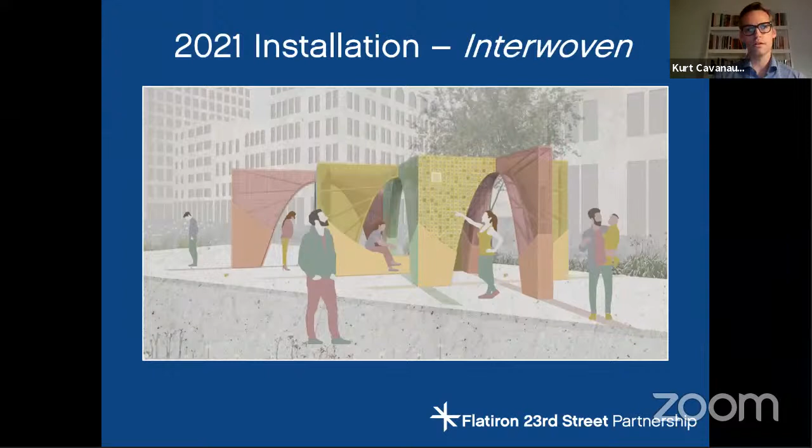In early August, partnership staff and Van Allen staff reviewed those designs and portfolios, and then the next day, myself, a couple others from our staff, as well as Van Allen's leadership, held interviews with 2 finalists. This year's piece was awarded to Atelier Cho Thompson, a New Haven and San Francisco-based firm, for an installation called Interwoven.

Interwoven is archways, a hammock, and benches constructed with steel framing, netting, resin panels, and high-density cork. The firm is very committed to sustainable design and carefully chosen materials, including the rapid renewable cork and the steel, which is made from mostly recycled content.

This piece here gives you an overview of how it's constructed and what it's going to be. It's basically 3 sets of modules with arches with a steel frame, with a hammock component to the southern third, a bench component in the middle third, and an open frame on the northern end that'll have a fun story wall as well. There's another piece here showing the side angle looking from the west to the east.

On the northern end, the panel has pieces you can see there. That will be a prompt that says, 'I dream of a world where we can,' and people will respond to that with written submissions, but only during activations. It will not be anytime you can plop a response to it.

The middle archway shows the bench feature. The bench is actually made of cork, as are the footings of the piece. And then the southern piece will show the hammock to the right, and the bottom forms show the 'feet,' so to speak, on the bottom of the piece.

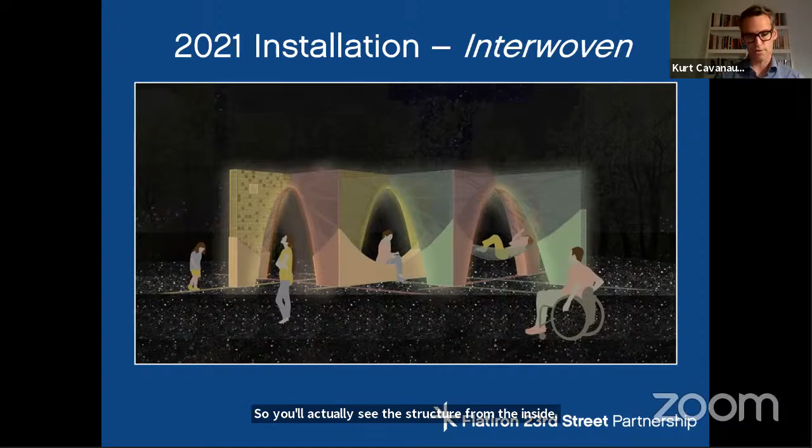Most of those are what is called 3-form resin. It's a very hard, almost hockey puck-like resin material that you can sort of see through a little bit. The top will be polypropylene quarter-inch netting that will be painted and installed to the sides as cladding. So you'll actually see the structure from the inside and from the outside, but you can't climb on or touch the structure that forms the skeleton of the piece.

Atelier Cho Thompson was co-founded by Christina and Ming, who you see there to the left. They're bi-coastal, based in New Haven and San Francisco, and they were founded in 2014. This year, the project team includes them as lead design, and Smart Department, which is currently fabricating and will install and deinstall the piece. They're based in Bushwick, so they are a New York City firm.

Funding for the piece, first and foremost, comes from the Flatiron Partnership, but Atelier Cho Thompson has just knocked it out of the park with their own fundraising, including grants from Poise, the Bounce Back Grant for women-owned businesses, and a $20,000 donation from Standard Asian Americans as part of the Asian Pacific Fund, and an anonymous donor also donated $10,000 to the piece. A lot of in-kind sponsors have contributed as well.

Engineering, lighting, and even the signage for the piece were all donated. 3-form, the cladding on the sides and bottom of the piece, almost 6 figures worth of material was donated, so that's incredible. And I will read the artist statement about the piece.

Interwoven celebrates the joys of intersecting with our community in public space. Inspired by the dynamic geometry of intersections that form the Flatiron Building's shape and America's woven tapestry of cultures, the installation is an unfolding set of interactive archways.

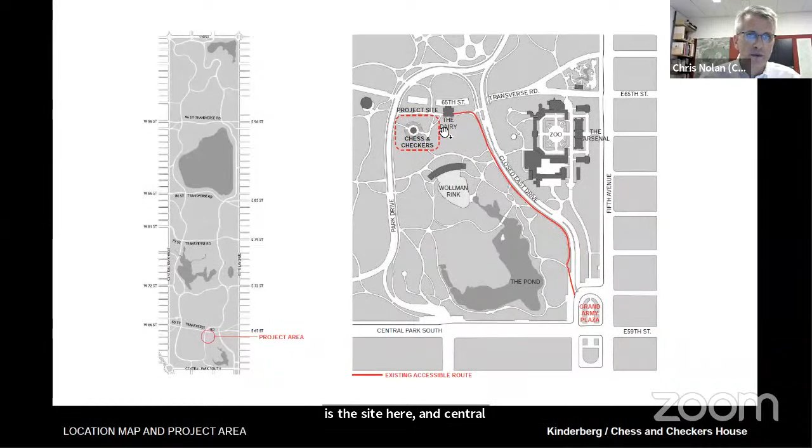So this is the footprint of the historic Kinderberg, which was the park's largest rustic structure. I'll get into some of the existing conditions a little bit later. This is the site here, kind of Central Park South, Fifth Avenue, Grand Army Plaza. It builds on some accessibility work. We have just completed the dairy, which creates an accessible route coming from the southeast corner of the park up to the dairy, and then ultimately up to Chess and Checkers if this work is approved. It brings back an important historic element, character-defining for this area of the park.

This is the accessibility work, soon to be open to the public. The path is now open to the public. The restoration work at the dairy has now been completed and will be opening in the coming days. A beautiful restoration of the core and shell. Interior work has been done also, really spectacular.

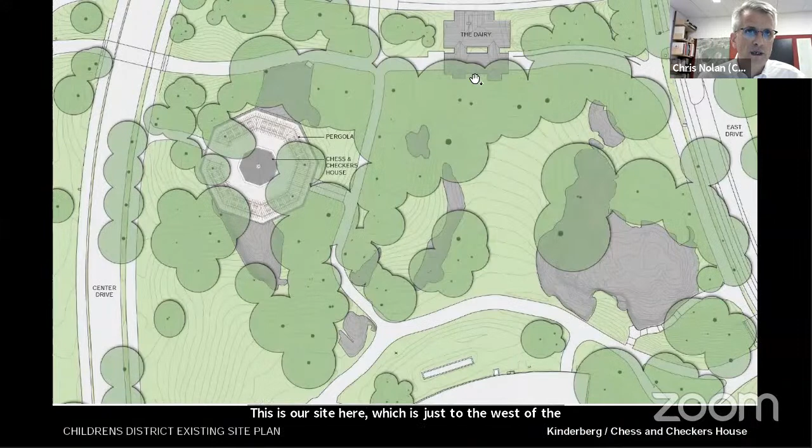This is our site here, just to the west of the dairy. This is the access ramp to the dairy, the loggia, which was restored. And this is the site of the Kinderberg. This shape here is the actual historic footprint. Inside that was the Chess and Checkers house, built in the 1950s. I'll go through some of the history, and our project is to restore the rustic structure, restore the existing Chess and Checkers building, and create accessibility to the site.

So some history. As I mentioned, this is all part of an area of the park south of the 65th Street Transverse Road, which was referred to as the Children's District. Within the Children's District was what was referred to as the playground or the ball grounds, which was developed into Heckscher Playground and Heckscher Ball Fields.

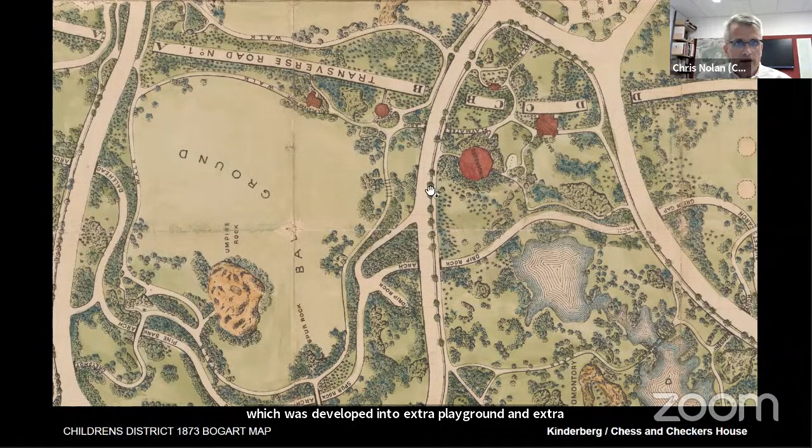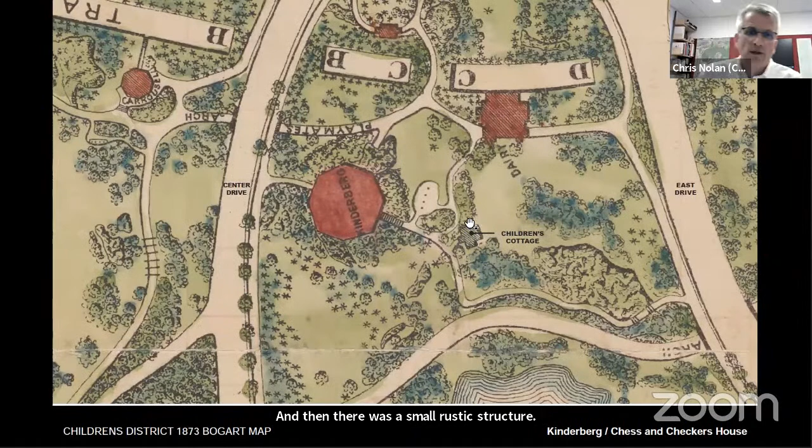On the east side of the Center Drive, there was the Kinderberg, which is the park's largest rustic structure, the dairy, which was conceived to distribute milk from upstate New York to children, and there was a small facility called the Children's Cottage, which was basically a public restroom to accommodate this particular cohort of park users.

This is actually an interesting footprint. It was a historic swing set from the 19th century.

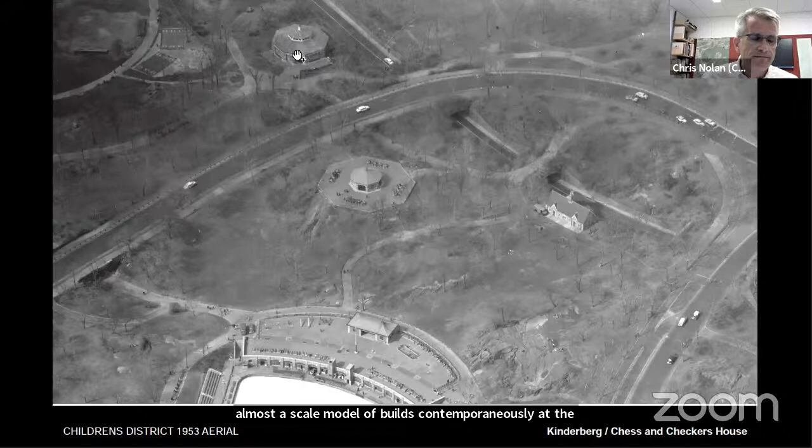The rustic structure was lost in the 1940s, and by the 1950s, the Parks Department had proposed the construction of a small brick pavilion referred to as the Chess and Checker Shelter. It was an unheated facility that opened up to the plaza area out front with chess and checker tables. You can see it's almost a scale model, built contemporaneously at the same time the original wood carousel building was rebuilt as a brick structure. It's a similarly detailed structure and has remained intact since then.

As you can see, it was out in the blaring sun, with chess and checkers tables around it, and the footprint has been marked since the park's original construction.

So the existing condition: the chess and checkers structure has remained essentially the same. We added heat to it in the 1980s, and in the mid-1980s, I believe 1986, we constructed a dimensional lumber rustic pergola to create some sense of scale around the building itself. The trees were added sometime before that, we don't know the exact date, but probably sometime in the 1970s.

And the wood and concrete benches go all the way around. You can see this is what marked the original footprint. The condition of the pavement, the tree pits, and the pergola itself is in poor shape. The pergola needs to be rebuilt, and we now have the opportunity to recreate it as the rustic structure historically was. The pavements will be replaced, and the benches and chess and checker tables will remain.

I'll take you through the proposal. The actual core and shell of the building we will restore in kind, cleaned and repointed. The doors and windows will be replaced in kind, without the security grating.

The interior space we have used as a kind of intermittent programming space since the mid-1980s, never terribly successful, operating as a visitor center. The primary purpose is to give out chess, checkers, and board games, which people primarily play outdoors. It's an odd-shaped building with no public restrooms, and literally we hand out tour material for people to go use the park. One of the greatest questions they get is where are the public restrooms, and there are none in the area.

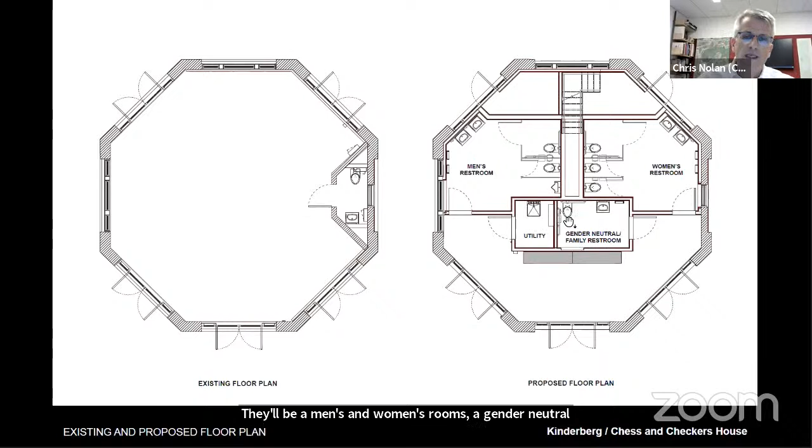Significant improvement in terms of public amenities in the area. The interior space, two-thirds of it, will be converted to public restrooms, much needed, since there are no public restrooms in the dairy either. There'll be men's and women's rooms, a gender neutral facility on the front side, and necessary utility space to keep these restrooms clean.

There's some mechanical space on the back side. The east side of the facility will be open to the public, and we'll run our programming out of there, giving out chess, checkers, and board games for the programming outside.

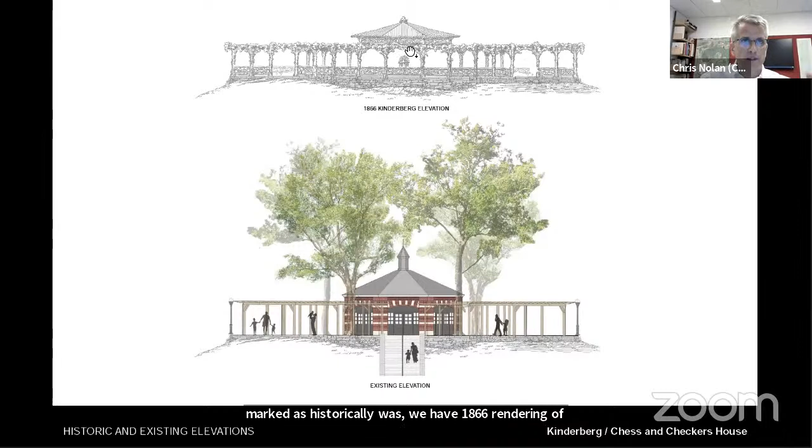So the primary gesture of the project, in addition to the public restrooms and accessibility improvements, is to recreate the rustic structure. The footprint of the Kinderberg is well marked as it historically was. We have an 1866 rendering of what it was, which shows kind of a central covered section.

For the most part, the existing slate roof is kind of referential to that, and our intent is to replace the dimensional lumber pergola with a rustic pergola around the outside, increasing the scale and mass of what's out there today significantly.

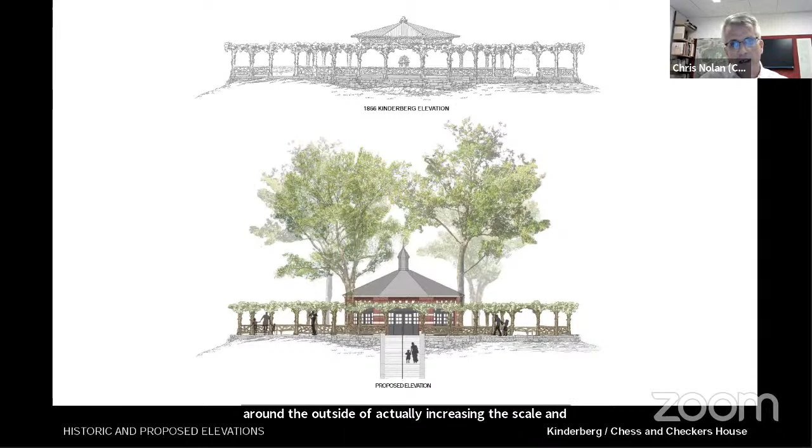You can get a sense of how elaborate the interior of the rustic element was, with benches all the way around. This is basically a plan view.

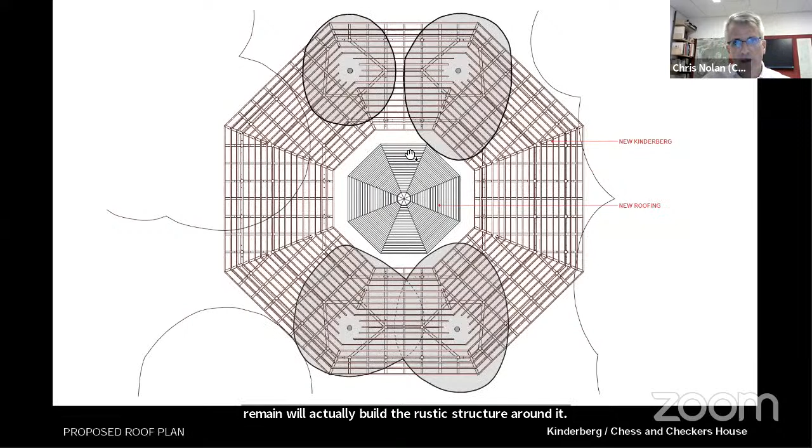The existing trees will remain. We'll actually build the rustic structure around it, and push the rustic structure out, cantilevered just over the edge as it was historically. Most importantly, this marks the scale of that as it relates to the rest of the park, kind of enveloping the structure itself.

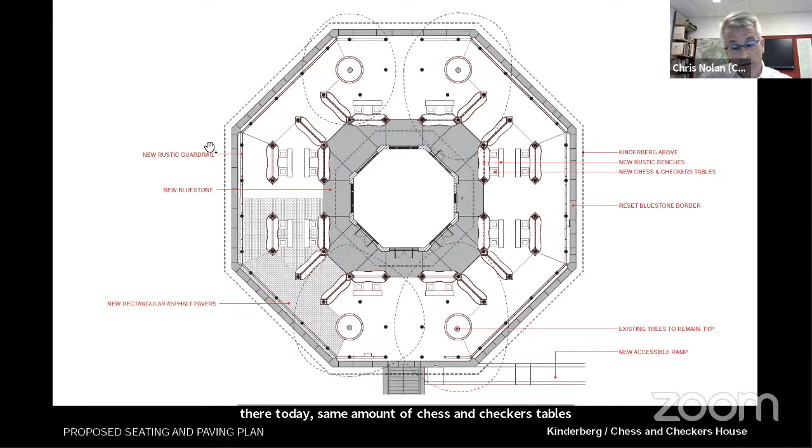You get a sense of what that is in plan. There'll be an increase in the amount of benches there today, the same amount of chess and checkers tables. The tables and benches will relate to each other, with an increase in benches around the perimeter, looking out to the views from this high point in the park. You get a sense of what our model is as we created that.

Much of the decorative rustic work we do in the park, almost all of it outside of the structural work, is done by our highly qualified in-house rustic carpenter crew.

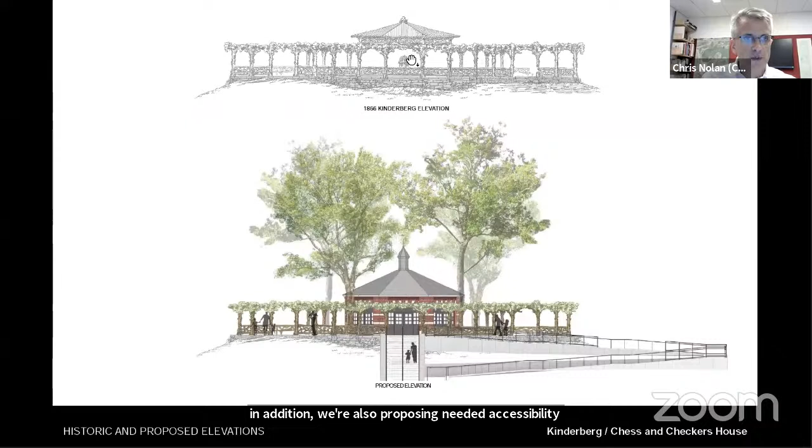In addition, we're proposing needed accessibility improvements to make this site and the public restrooms accessible. You get a sense of what it was historically, and our intent is to create a ramp modeled on what we did both at the dairy and successfully over at the Arsenal, coming in from 65th Street down to the zoo and the Arsenal area, starting at the same entrance point up to the Kinderberg and onto the plaza itself as an issue of equity and access.

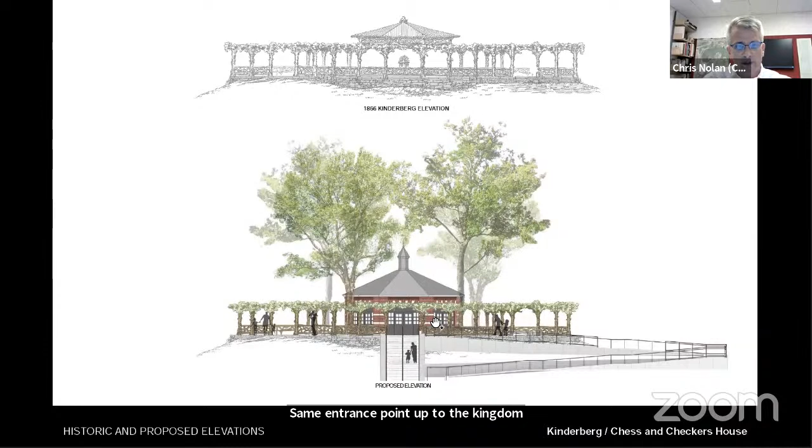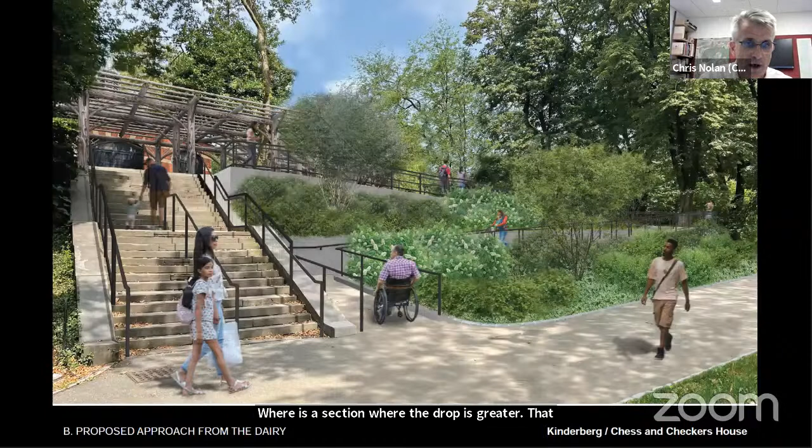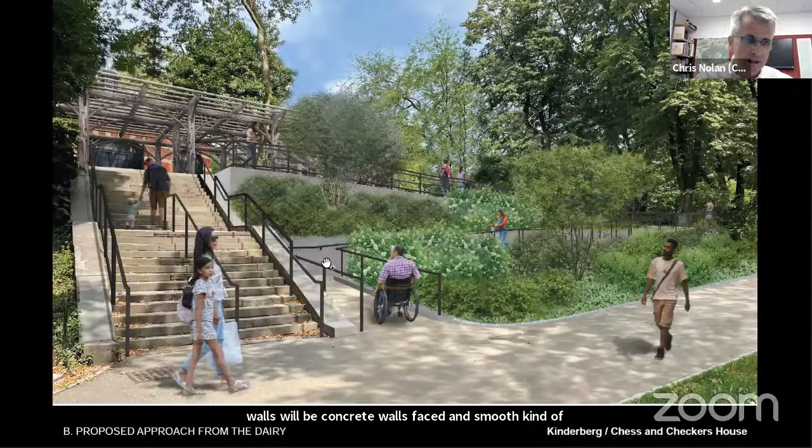It'll be a very transparent guard built onto the handrails with the wire mesh used around the playgrounds, as is the case along here, with very dense planting to hide it. The walls will be concrete, faced in smooth, large pieces of bluestone, to be like a modern element behind the plantings without being too heavy. I want to end on an illustration of what we had done at the Arsenal.

It's actually been an enormously successful project. There was some concern that it wouldn't blend into the landscape, but over time, as the planting blends in, it's actually become one of the most heavily used entrances now. All the people who come to both the Arsenal and the Children's Zoo, people with mobility devices, baby carriages, and anything can get down that slope. And that is the whole proposal.

I'll be happy to answer any questions. Thank you so much, I'd just love to kick off questions with, can you give us some detail about the price tag for this, the funding, and the timeline?

Sure, Lane, you want to handle it? Yep. So the price tag is roughly a $7 million construction project, and the funding is privately funded. It's actually the same donors who did the dairy restoration, so it's a continuation of that, and actually the same family foundation that funded the Belvedere restoration we did a couple of years ago.

The timing is that we're hoping to finish the public review process and go through Landmarks and the Public Design Commission by the spring, and be in construction a little bit later in the spring. To begin next spring? Next spring. And then how long do you think it will take? Our goal is to be done by the end of calendar year 2022. As we complete the design and figure out exactly how we're breaking the project into contracts, we'll hone in on that a bit more, but our goal has been the end of calendar year 2022 — about a 9-month construction process.

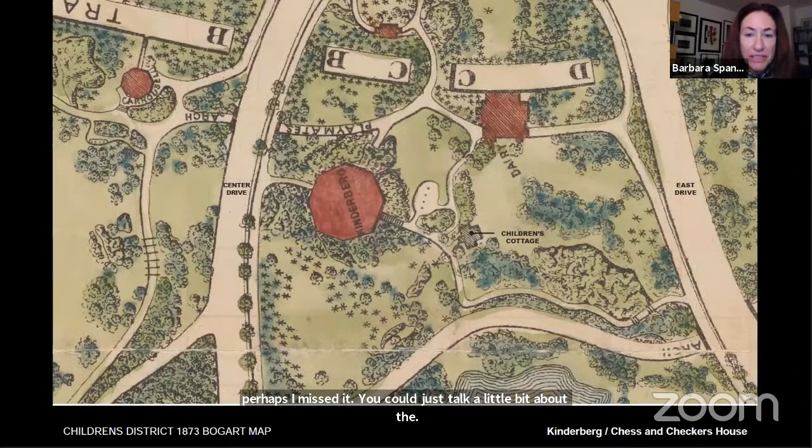Thank you. Thanks, Karen. Yes, Barbara. I just wanted to go back to the Chess and Checkers Pavilion. Perhaps I missed it—could you talk a little bit about the doors? I mean, everything is going to be replaced, and could you explain a bit more about what's going to be there when this is all done.

Sure, Barbara. Yeah, so the doors and windows will be replaced as they are. The masonry will be cleaned. Basically, the difference will be that it won't have the actual security wire. That's what I wanted to know. Yeah.

And we'll get a handle on the signage and the Windex bottle up there too. And I assume that the doors will be ADA accessible, of course. Yes, right. Okay, thank you.

Thanks, Barbara. Other questions from members of either committee? Yes, Suzanne, go ahead. Two quick things. One is, can you speak to any increased lighting in the area, because it's pretty dark? Sorry if you've already mentioned that and I didn't hear it. And secondly, will you be selling any food or drinks, and if so, will you be creating more of an opportunity for sanitation?

There will be no food or drink concession up there. The dairy is actually our primary retail gift shop in the park, and all retail operations will happen there. This is purely public programming.

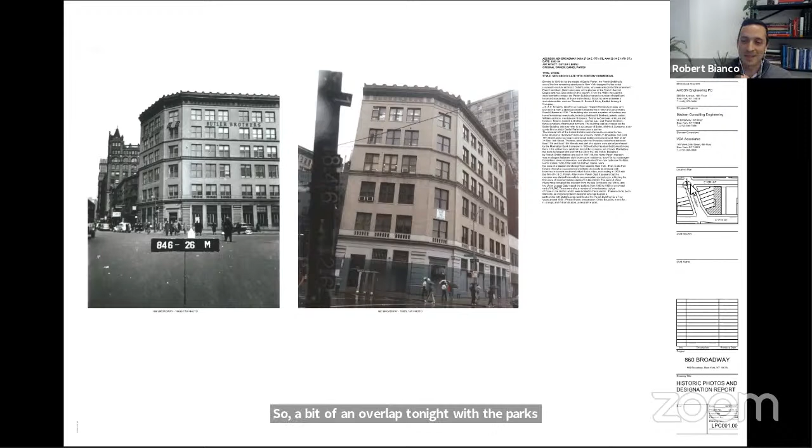860 Broadway is located in the Ladies Mile Historic District, and we are the one building in the Ladies Mile Historic District that fronts onto Union Square Park. So a bit of an overlap tonight with the Parks Committee. If anyone stuck around from the Parks Committee, I thought this was a nice opportunity to discuss an application for outdoor recreation space on a building that overlooks a public park.

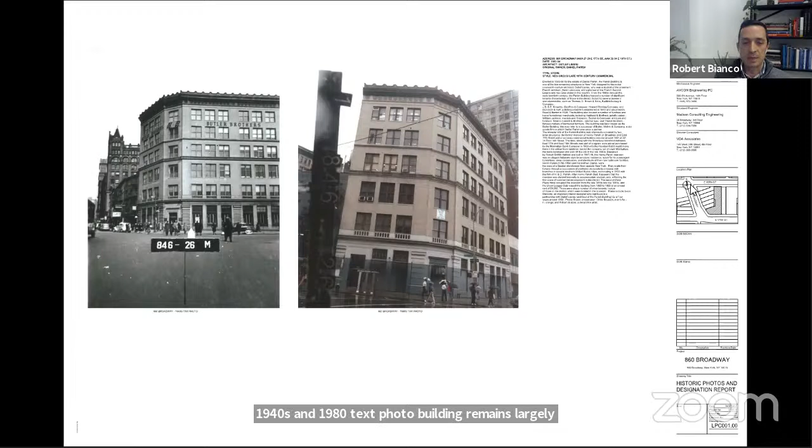The building was constructed in 1884 by French-American architect Detlef Lienau. You can see in the 1940 and 1980 tax photos the building remains largely unchanged today since a major facade replacement in 1925. However, we were recently involved with some building infrastructure upgrades that occurred a few years ago, including elevator modernization, a new elevator that meets current code for ADA accessibility and stretcher compliance, and an expanded main building lobby. The building is accessed from Broadway.

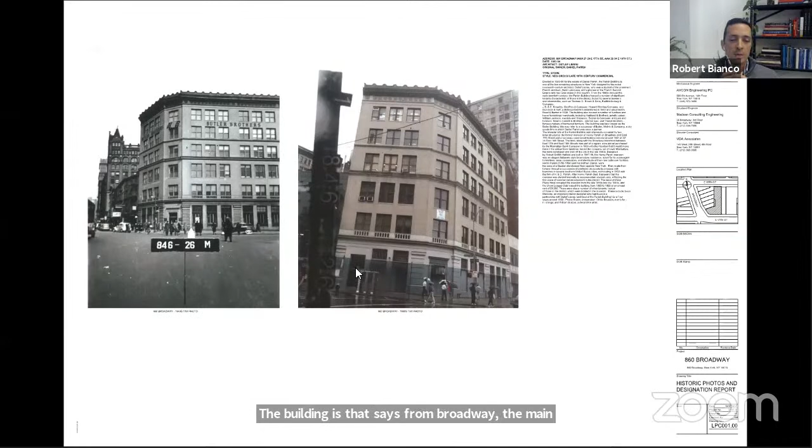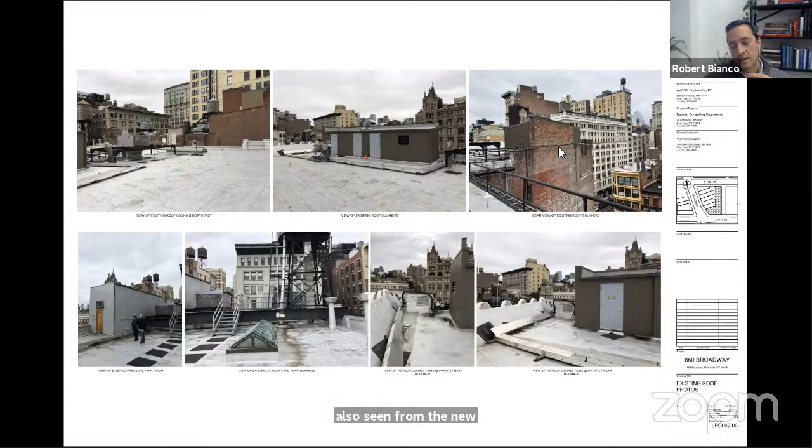To the left-hand side is the existing stair bulkhead, egress stair bulkhead, also seen from the north lot line. This is the facade facing north into the Ladies Mile district. The bottom row of photos are mostly showing the condition on the north side of the building, which is closer to 18th Street. The building also fronts onto 17th Street.

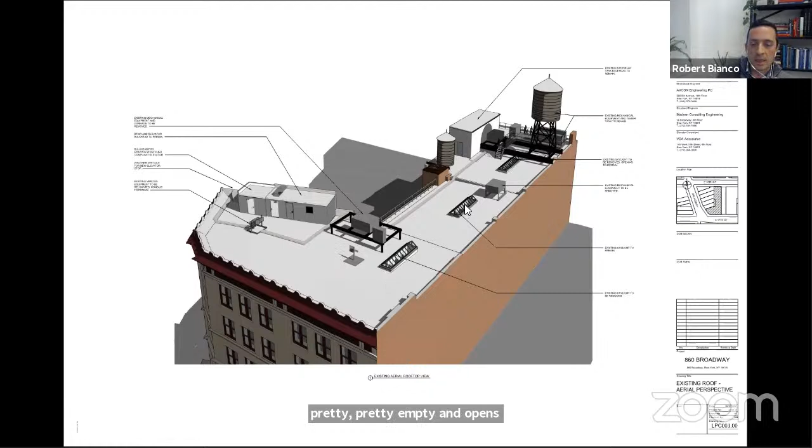A little bit easier to understand in this bird's eye view of the existing condition. The main stair and elevator bulkhead is located along the north lot line wall. The new stretcher compliant elevator is located at the southwest corner, closest to the main building entrance at Broadway. Toward the center of the building, the rooftop is pretty empty and open space, other than 3 existing skylights at the center line of the building, and some existing mechanical equipment on dunnage, which will be removed, replaced, and relocated to the north side of the building.

The north portion of the roof houses some mechanical equipment, 2 large wooden water tanks, an existing sprinkler tank bulkhead, and all that will remain.

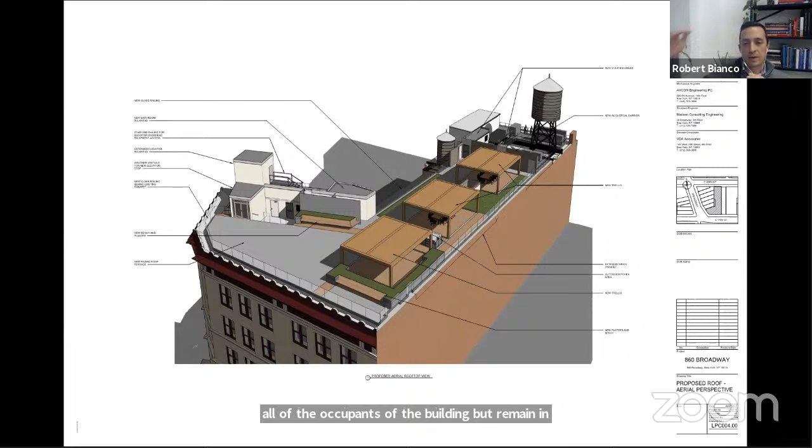This is the proposed condition. We are proposing a new rooftop terrace on a new raised platform that will be elevated above the existing roof. The existing office tenants, all of the occupants of the building, will remain in place during construction, which is the reasoning for building a platform above the existing roof so that the waterproofing envelope can remain intact while this is being constructed. The new stretcher compliant elevator will be extended to the roof level, and a new vestibule will be provided for weather protection for that elevator.

To the east of the stair bulkhead, we are expanding the bulkhead to accommodate 2 single-use, single-occupant toilets for the rooftop occupants.

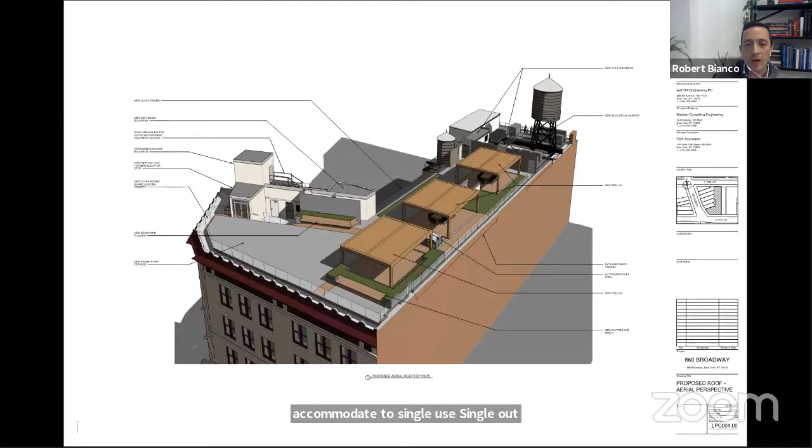All of the mechanical equipment that you saw in the previous slide will be relocated to the north portion of the roof. At the eastern portion, we're proposing 3 trellis pergola type structures to provide sun shading and some smaller gathering spaces for breakout meetings and small conferences.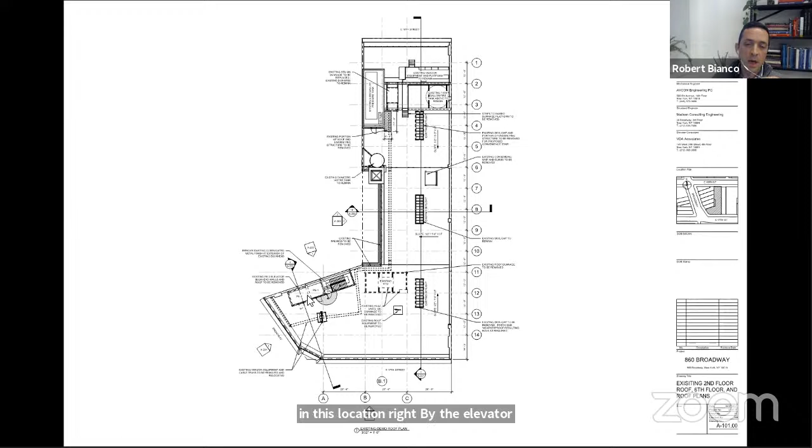Existing floor plan of the existing roof condition. Currently, only 1 egress stair extends to the roof, in this location right by the 2 elevator bulkheads. We're proposing to extend the stair to the north, up to the roof, to provide a second means of egress for the rooftop occupants.

An additional bulkhead that would be for dedicated use for the top floor tenant. At the northern extremity of the rooftop terrace, we're proposing an acoustical barrier to mitigate noise between the existing and relocated mechanical equipment and the newly proposed rooftop terrace.

Again, the stretcher compliant elevator will be extended to the roof and provided with a weather protection vestibule, and new single occupant toilets and an outdoor kitchen area will be provided, basically stacking with where the plumbing occurs on the floors below.

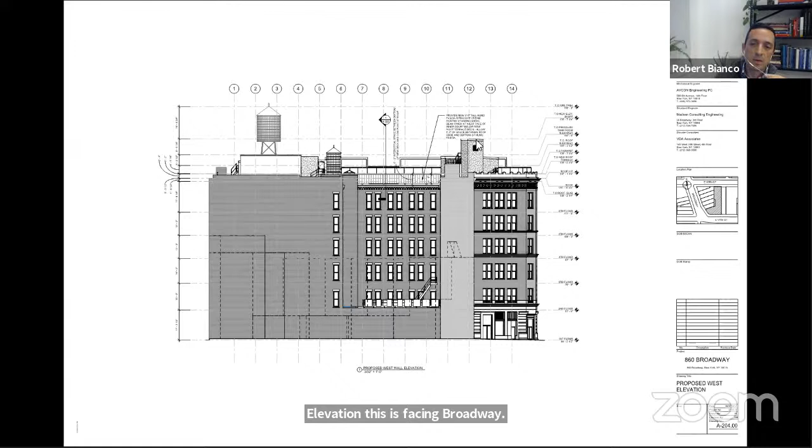At the western lot line elevation, facing Broadway, this is the existing condition. And here is our proposed condition, with a raised elevator bulkhead. This is the little vestibule for the new elevator.

At the inner court facade, this is the portion of the roof that slopes down the most. The existing roof below the raised terrace is about 5 feet below the terrace level. So we are proposing a metal panel fascia to cover that open gap, and again, a glass railing behind that.

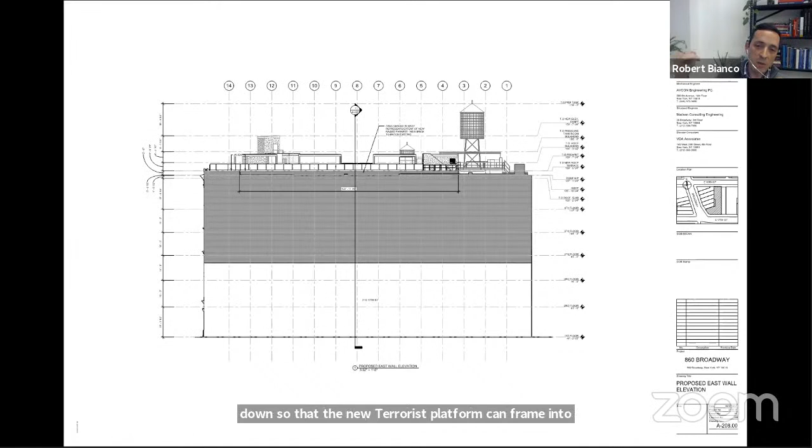This is the existing east facade facing east toward Park Avenue. In this location, we are proposing to extend and raise the existing brick parapet in the areas where it steps down, so that the new terrace platform can frame into the existing bearing wall, again with a glass railing behind that.

The 3 open pergolas can be seen beyond, and raised bulkheads beyond.

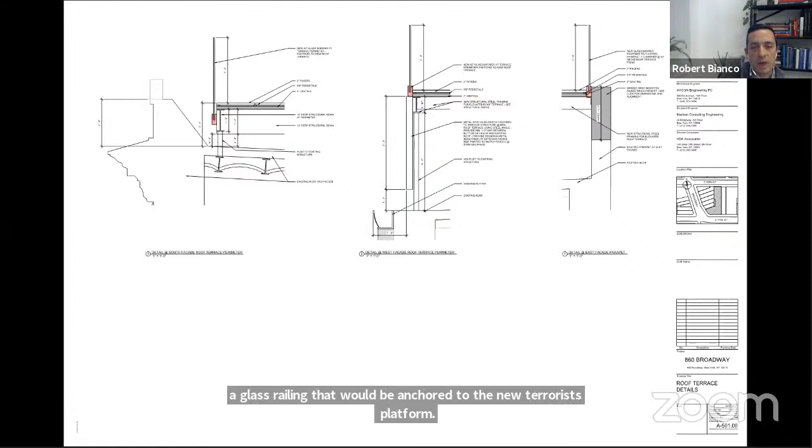On the left-hand side of the page, this is the parapet condition at 17th Street and Broadway. We're proposing a glass railing that would be anchored to the new terrace platform, behind the existing parapet. The center detail is at the western lot line, and the right-hand side of the page is at the eastern lot line.

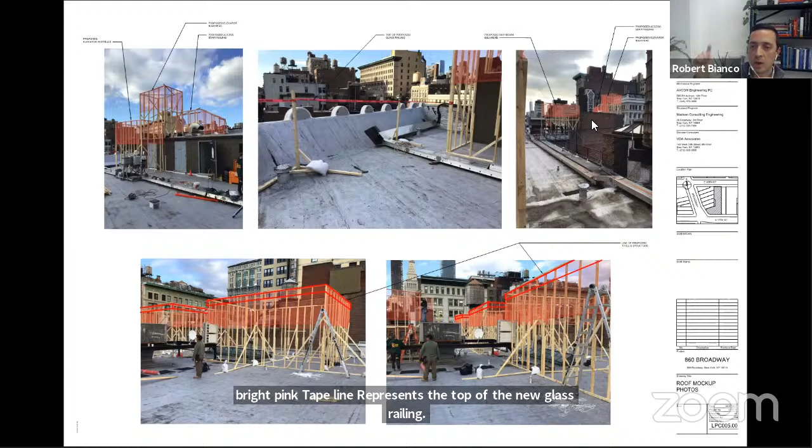In these bottom images, I just want to clarify that the mock-up was constructed to identify the highest point of the trellises or pergolas, but the netting is a little misleading because it's deeper than the actual structure will be. I've highlighted in a red dashed line to clarify that this will be an open structure with a flat roof, and the sides will all be open.

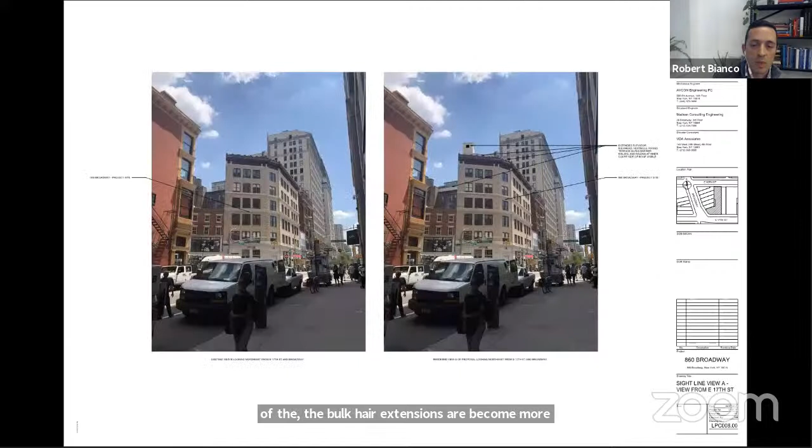Starting at 17th Street and Broadway, standing between Broadway and Fifth Avenue, looking east. We can see the existing condition on the left-hand side of the page, proposed rendering on the right, showing the expanded bulkhead, elevator bulkhead and vestibule. Beyond the adjacent buildings, you can see the extended or elevated roof terrace platform and metal fascia and glass railing.

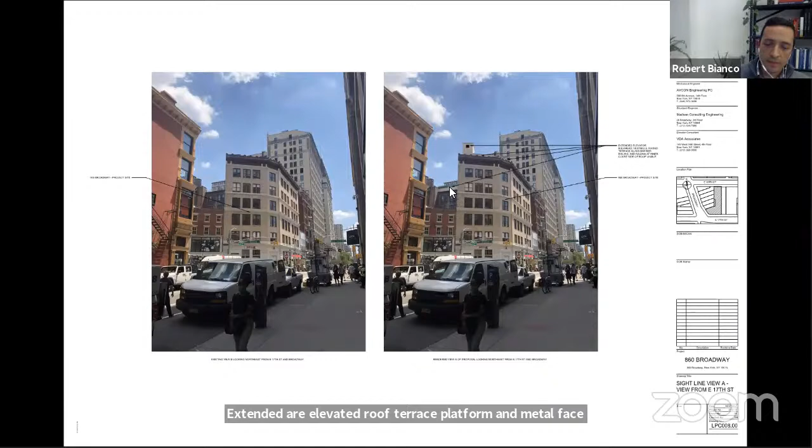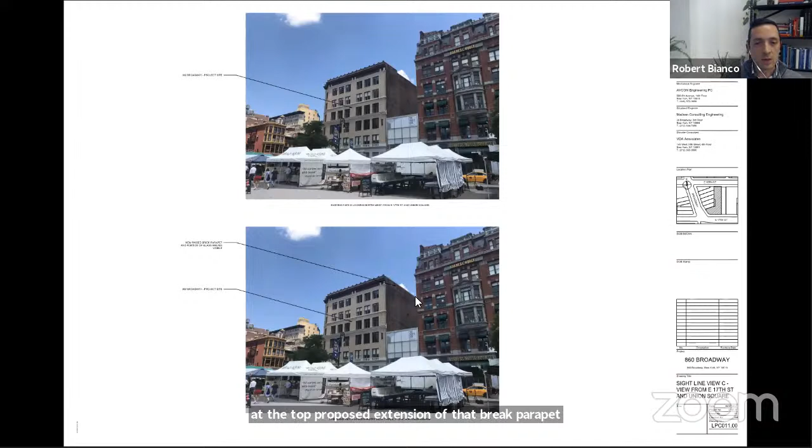Moving to the east side, this is standing within Union Square, looking back up to the north at the building. Existing condition at the top, proposed extension of that brick parapet to allow for the framing of the new roof platform, and then a photograph of the mock-up, showing a little bit more visibility of the pergolas than we had anticipated, but still minimally visible.

The further you get away, you do start to see more of these rooftop accretions, and a little bit of the elevator bulkhead, but that is also in the context of adjacent buildings, bulkheads, and various rooftop accretions on different landmark buildings fronting onto Union Square.

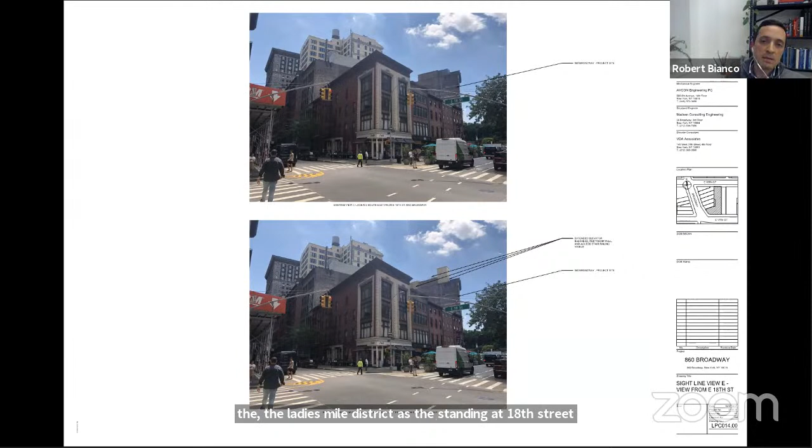Moving to the north as we're moving into the Ladies Mile district, this is standing at 18th Street looking south, existing photograph on top, proposed rendering at the bottom. The bulkheads are visible in this scenario, but they are seen in the context of secondary facades, not seen at all in the context of the building's primary facades. The mock-up construction confirms what we had anticipated.

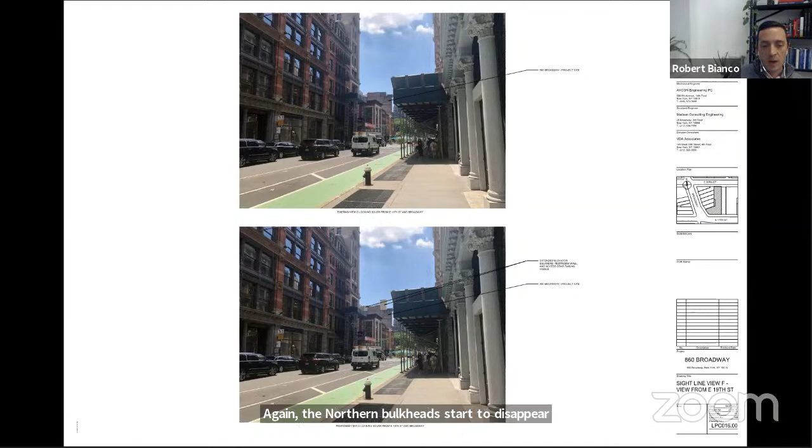Moving further up north, the northern bulkheads start to disappear. That main elevator bulkhead is still quite prominent, as seen in the mock-up construction.

By the time you get to 20th Street, the elevator bulkhead visibility starts to fade away. It's still visible at 20th and Broadway, but anything north of that starts to really recede.

Moving to the south, looking north, now this is looking at the primary facades of the building. In the bottom image, you can see that the bulkhead is visible, but here from the south it is visible in the context of other buildings in the background, and it's not seen against the sky.

We should also mention materials. We're proposing a light colored stucco for the bulkhead structures to reference the buff color of the main facade's brick, and also to allow those bulkheads to recede into the background, maintaining the prominence of that very strong expression of the existing scalloped parapet.

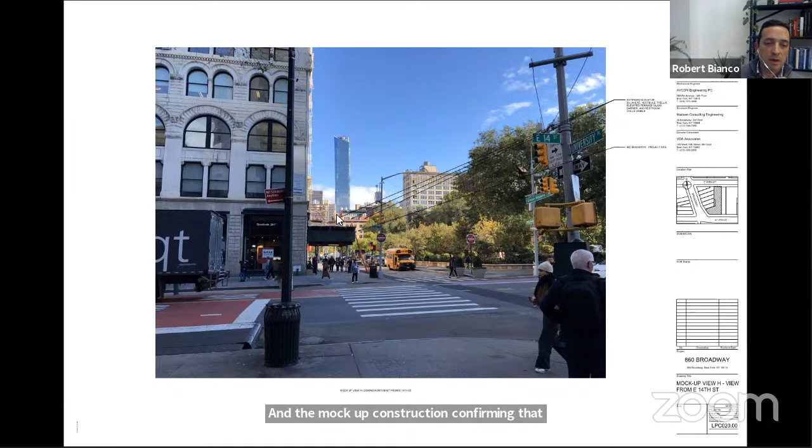The mock-up construction confirms the visibility of the elevator bulkhead extension, bathroom bulkhead extension, and a little bit of the trellis proposed pergola.

That visibility remains all the way down to probably 10th Street, but the further you get from the building, it really becomes so far away - still visible, but really far in the distance and in the context of a lot of other bulkheads and structures beyond.

We did also confirm visibility from the 18th Street side. There is practically no visibility of any of the structures we're proposing from 18th Street. There is a little bit of visibility looking over the one-story building to the east of the railing, and that's about all that can be seen from that vantage point.

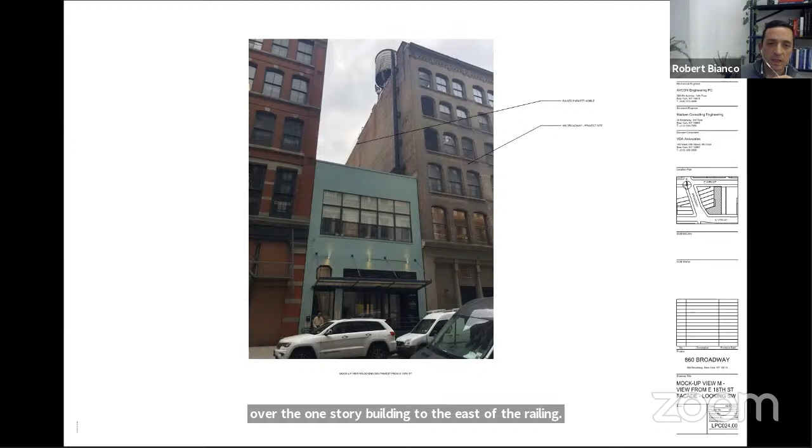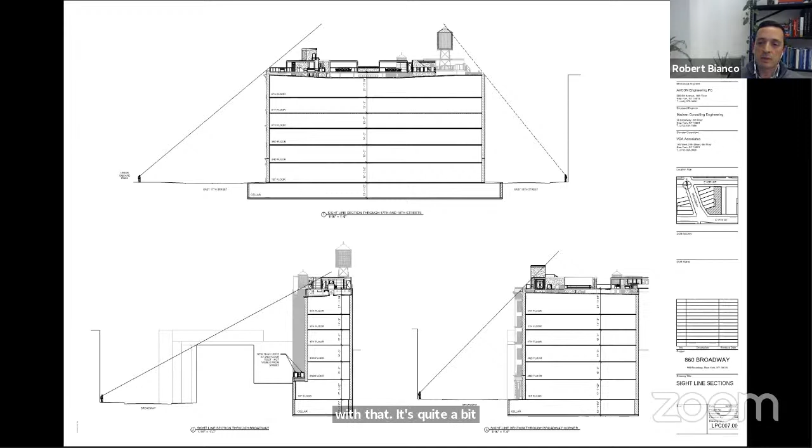Was the height of the bulkhead, is this the minimum? I mean, you can't make it any smaller? It really is the minimum. It's a factor of these elevators having their machinery in the cellar, so this is the overrun. Even with that, it's quite a bit taller than the existing roof since we're trying to extend that access to the roof level itself.

Could you talk a little bit about the kitchen on the roof? How do you envision this is all going to be used? I mean, this is not a restaurant. No, absolutely not. It's for use by the building's occupants. The kitchen area is located in the center for use by occupants to the north or south to share, and that location, along with the bathrooms, is really just determined by the location of the plumbing stacks below.

How it's going to be used is really just for maximum flexibility—not large events, but whatever in-house events that one of the office tenants might plan for: small gatherings, office breakout space, an office lunch, or something like that.

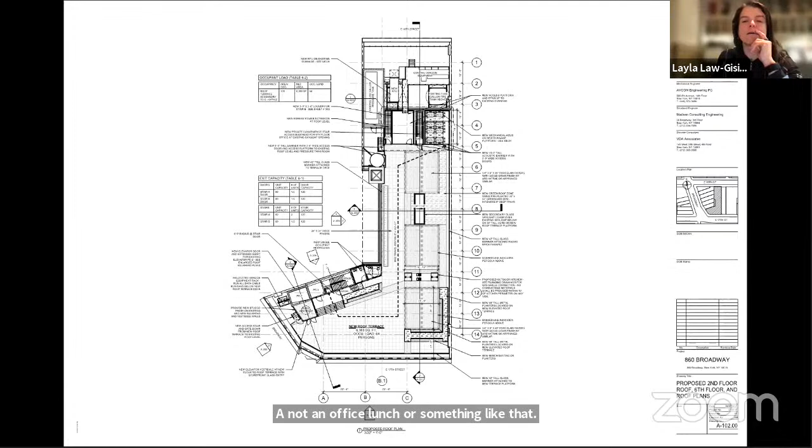Both of my questions are safety related, both for the tenants and for the structure itself. First, regarding the railing you mentioned—I believe you said it was glass—can you share the height of that railing? The reason is both for safety of the users of that space, and because the street underneath, in front of the landmark building, is a one-way street with a lot of bike and pedestrian traffic. You've probably been familiar with some of the accidents that have happened there. I'm also a little concerned about the structure itself in case there might be a fire, for the kitchen space, not to mention concern for people nearby.

Is the concern for fire safety related to the railing height question, or is it a different matter? It's two different parts. The railing height question is really about the fact that there are pedestrians underneath—obviously you don't want things flying over that railing, potentially impacting pedestrians in front of a historic building, one appreciated for its history as shopping and retail.

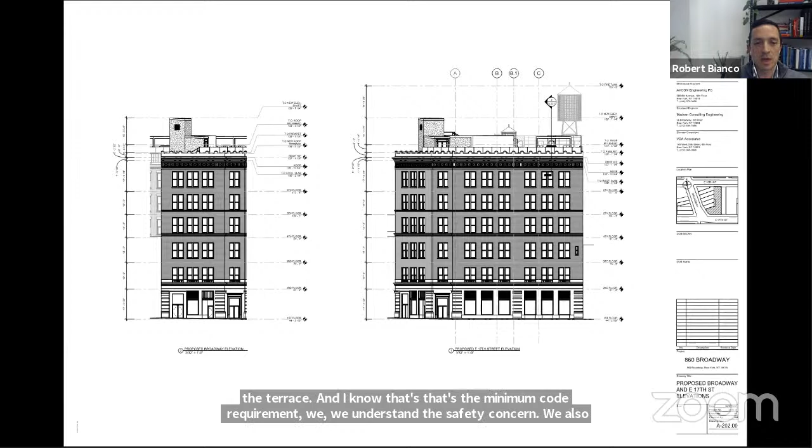We're showing the railing as 3'6" above the terrace, which is the minimum code requirement. We understand the safety concern. We're also setting the railing back from the existing parapet so it's not right at the edge—there's quite a gap between the existing parapet and the proposed railing. So I understand the concern about 42 inches being a little too low; we're trying to address all sorts of issues, visibility from the street and safety.

To address the fire safety concern, we looked closely at the rooftop occupant load, stating an occupancy of around 64 persons, which is below public assembly—this would not be a place of assembly. It would accommodate up to 60 to 66 people, I forget exactly. But we are providing the extension of the second egress stair to accommodate those additional occupants.

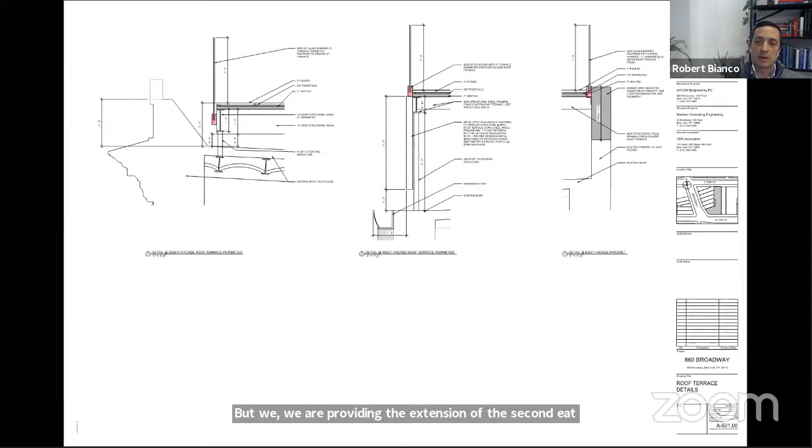My question is about whether you did any studies that pulled the pergola structure in more centrally located so it would be less visible from the public right of way, leaving the open space area more on the perimeter. I didn't know if that would yield something less visible or not. And then I have a follow-up question. Locating it more in the center, kind of where my cursor is right now.

Yes, because of the strange geometry of the building, you can see that would start to become quite a narrow space, and not terribly usable. The proportions of these more rectangular gathering spaces at the side are, I think, better for the office tenants' uses.

For meetings or conferences or just outdoor team lunches or something like that. We wanted to kind of leave this main area just open and simple, and not crowd it. The closer you get to the center, the more crowded you get into those existing bulkhead access and elevator vestibule.

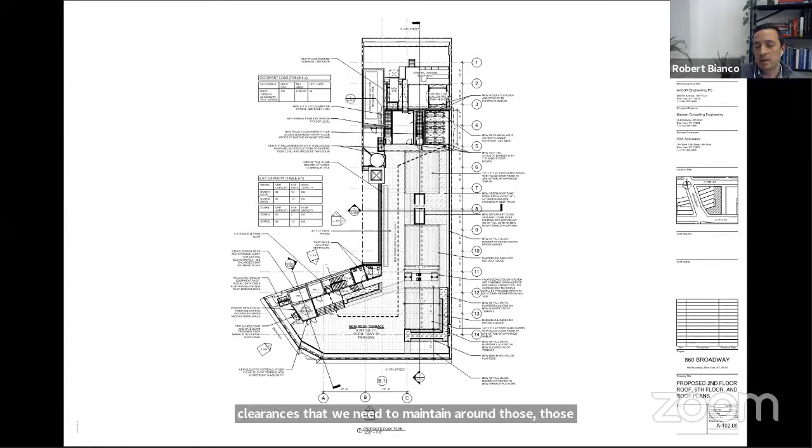There are a lot of clearances that we need to maintain around those access points. Okay, second question — if you can reference drawings 14, 15, and 17, the ones that show the visibility from some of the side streets. And the question is about the color of the material selection.

I think you said it was a light colored stucco for the bulkhead additions that matches the primary buff brick — but at the photograph, sorry, not the drawings. Yeah, sorry, my file is just a little slow. I think so — well, I'll keep talking while you're flipping.

The question is about the nature of the color — selecting the buff versus a reddish brick, because while the primary facade is buff, the secondary facades... maybe try another one. The buff color really jumps out to me compared to the red background, like the red brick from the north facades, where buff is on the primary, but that buff really pops out to me. I wondered — I'm just debating whether red brick would blend away a little bit better than seeing a big buff brick on top of the red facade.

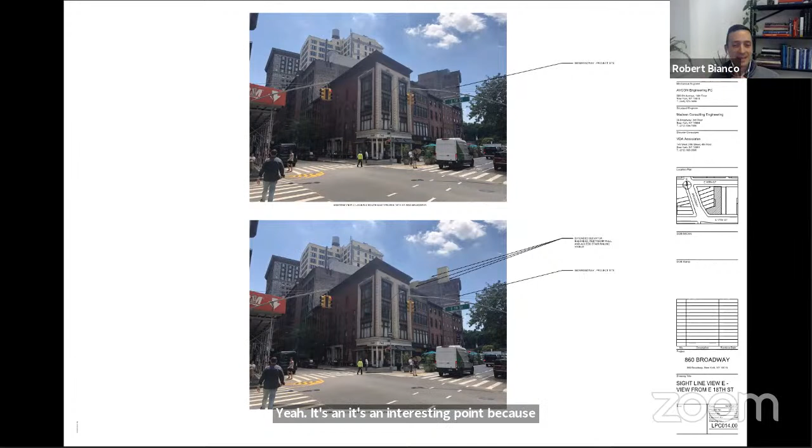Right. Yeah, it's an interesting point because we did look at it several different ways, and I think we ultimately landed on maintaining the stucco, because we looked to the existing bulkhead on the northwestern portion of the building that has that very strong line of the brick and then the bulkhead addition above. So we thought that would be consistent with the language of what exists on the building today.

But this is a point that's debated a lot at LPC. Some of the commissioners and some of the staff there like to maintain the memory of what you see here of the existing or original brick lot line wall, and treat any additions differently, just so that the memory of what existed previously is preserved.

But others might say, well, it's a brick bulkhead now — why not extend the brick to that lot line wall? So to answer your question, yes, we have looked at different ways to approach it based on discussions with LPC. We felt that this was the most appropriate way to treat those facades.

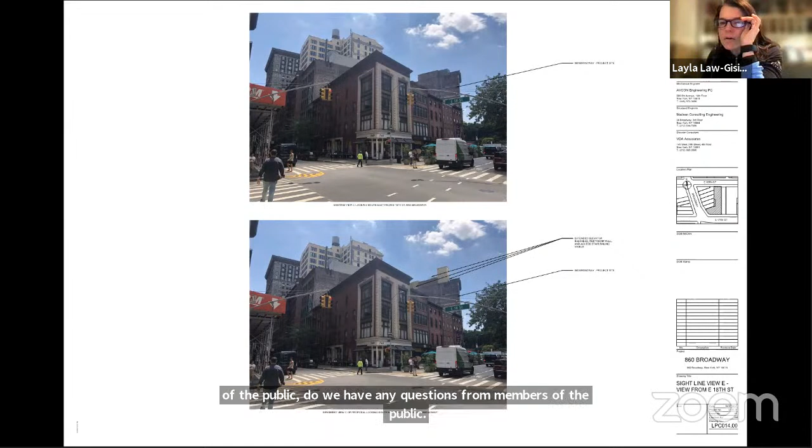Hello, can you hear us? Yes. Okay, hi, I don't know why our camera is not on. Can you turn—there's two of us here. There's Charlotte Willer and my name is Victoria Ashley. We're trying to turn the camera on so you can actually see us, but I'll go ahead and speak since I know time is of the essence.

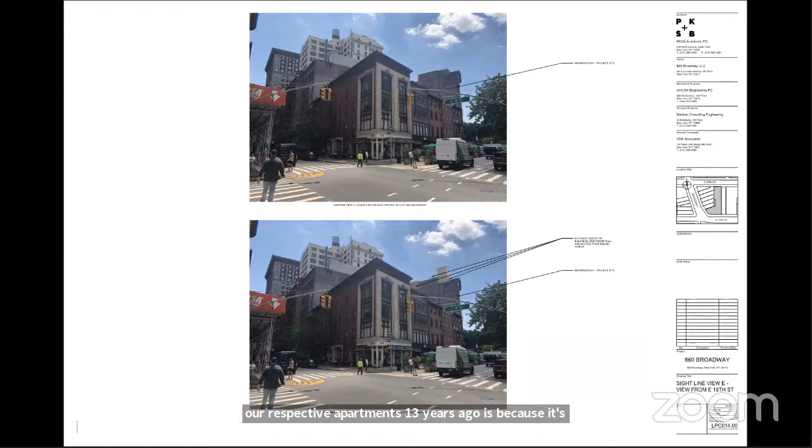We are tenants of 874 Broadway, and I'm on the 7th floor, Charlotte's on the 8th floor. We look directly across at what is being built right now, and it is very concerning to us because it is very much an eyesore from this vantage point. It impedes our view. The reason that both Charlotte and I moved into our respective apartments 13 years ago is because it's a gorgeous landmark building with an unobstructed view in an area that is not zoned for additional building.

And, you know, this is really the beauty of this building and of this neighborhood. To look at our window and all of a sudden see the structure, it clearly impedes the view. It stands out like a sore thumb because it's an unusual height that's disproportionate from the level of the roof. And it's open right now. It's just pieces of wood, as you had said, to give a rendering of it. But when it's filled in, it will absolutely interfere with our light.

Hearing the proposed recommendation for the terrace with the guest capacity of 60 people on the roof, that is also disconcerting to hear—that noise at any given hour, and cooking, etc. I'm on the board of this building, and we love our building here, all of the tenants, and we were thrilled that the decision in 2013 was upheld not to interfere with the building of 2 floors.

Right across the street from us, which would certainly interfere with our beloved views. But seeing this, we are happy to provide pictures. We have them, we can email them tonight if you like, for your consideration, just to see what it looks like from our vantage point. So we really implore you to keep the neighborhood intact as it was meant to be, and as we're enjoying it now. We really implore you to turn down the proposal, because it would be detrimental to all the residents in the building and would interfere with the beauty of the neighborhood.

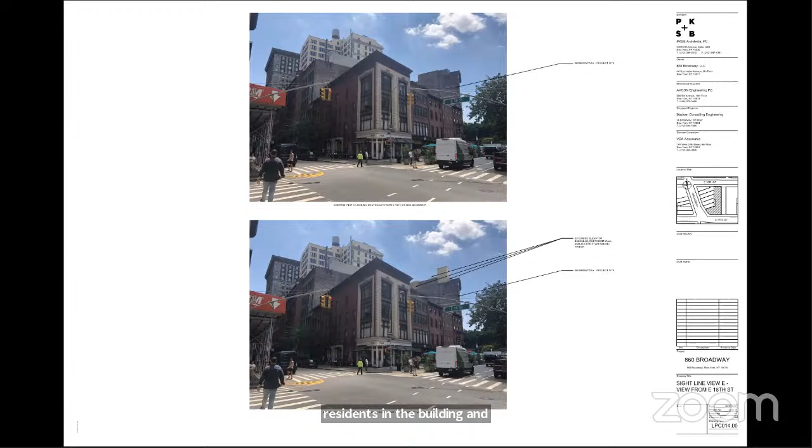Thank you. I just want to address one point. As you mentioned you are in the company of another resident of the building, does he or she wish to speak? I would allow the two of you to speak, and then the applicant can address your comments and questions. So I'll let Charlotte speak - it's not that she doesn't have a voice, but rather than us talking over each other, I'll let Charlotte go and speak as well.

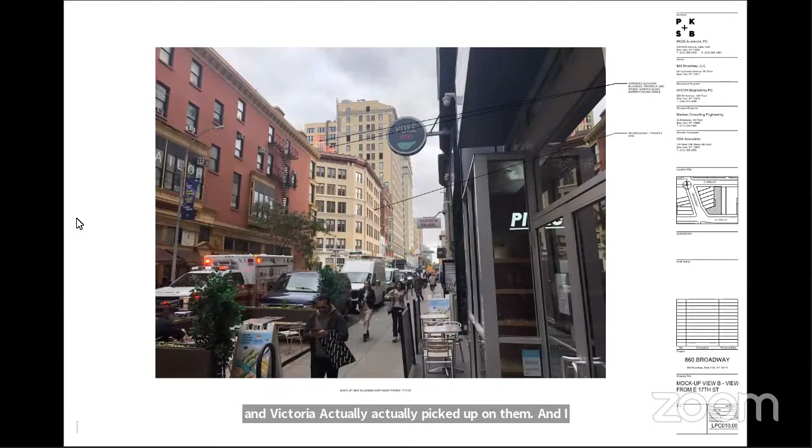Hi, I'm Charlotte Willer, and all my points Victoria Ashley actually picked up on, and I do think it's a worry to have. First of all, the bulkhead is really a problem, I think, and also the fact that there's going to be a kitchen, etc. Not only is it going to smell bad, even if they're out in the open air, because the wind carries it - it will carry it right over to our building, and the noise, everything. So I honestly think it's really not a great project at all.

Thank you. I will turn it back to the applicant to address those comments, and then we have one more hand up from a member of the public. But I will let the applicant address these two comments that were made.

Sure, and I appreciate the comments and concerns, and we will look more closely into the views. Unfortunately, the Landmarks Commission reviews only views from public rights of way - so from streets or public parks, or anything elevated like the High Line, something that's open to the public. So views from private property are not under their purview, but I totally understand the concern and the impact on the neighborhood and the occupancy of the building.

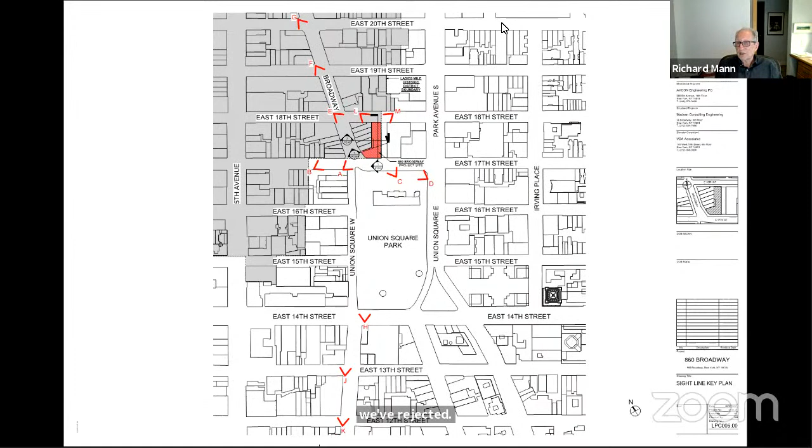Thank you, Richard. Tony. Thanks, Layla. We're always struggling with making sure we're protecting the landmarks while also allowing historic building owners to move forward and attract tenants and stay viable.

And I think we can all agree that we want this building to succeed. For such a boutique building, this is a pretty intense roof plan with bathrooms, with these really big seating areas, with lighting, with kitchens, stuff like that.

I think probably the biggest disadvantage for this building is its position. Fronting Union Square, you have real big visibility. Having that really amazing block of low-rise buildings just to the north along Broadway makes things much more visible. The elevator placement being closer to Broadway, closer to the street, is unfortunate, but trying to allow tenant access via elevator to the roof makes them have to increase that height so dramatically. I think from every position it will be an eyesore, and that will really detract from the landmark itself.

I am concerned about lighting as well. We didn't hear a lot of details about lighting because this space looks to be so big, I imagine there'd be a good amount of it. Having any kind of metals, having glass railings, I'm concerned about reflections, about pulling the eye upward during the evenings.

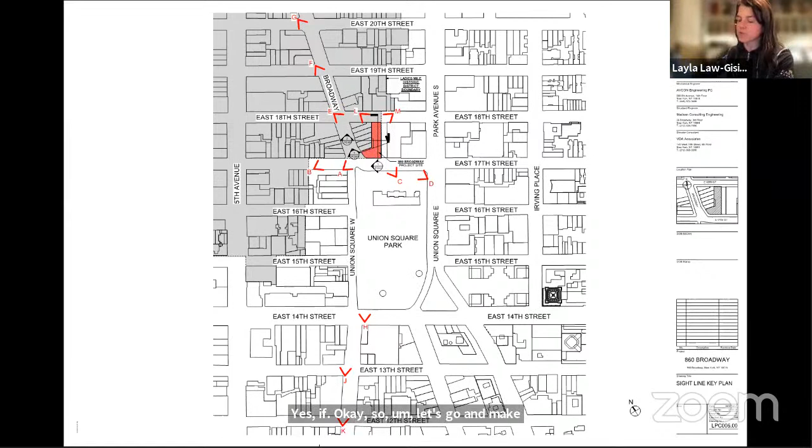Okay, let's go and make a motion. We need a motion on this. Motion to deny. And we need a second. I second. Second. All right, okay, let's take this to a vote.

All right, so motion passes unanimously. Thank you. Moving on to our final application of the evening. This is 18 East 41st Street, an application for a facade restoration project. I think we have the applicant with us.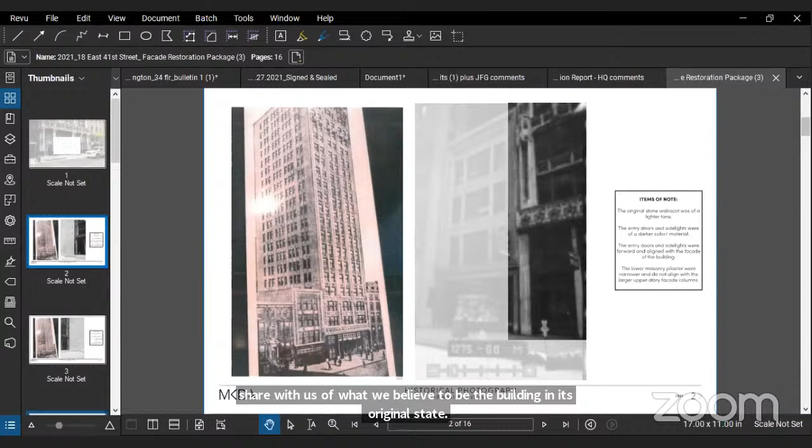Following our series of slides that will take you through, here on the left is an undated rendering that the folks at LPC were kind enough to share with us of what we believe to be the building in its original state. And to the right, you'll see some tax photos. They're kind of pieced together, but that's how they were registered and that's how we got them. What you see on the right of this photo is the east end of the building, showing what is today an entry into the retail space.

Just want to point out, as an item of note, how the storefront is close to the facade of the building, and the narrowness of the ground floor piers, the pilasters. Here is the opposite end of the building, the west side, with the tenant entrance. Again, the storefront is forward to the facade and the columns are narrow.

And lastly, of the tax photos - where did my cursor go? There it is - the building, although obscure in its whole presence.

We were able to find some original blueprints. This goes back to the 1914 drawings by George and Ed Blum, the architects of the original building. This shows the tenant entry, where you see a series of 3 doors up at the facade of the building.

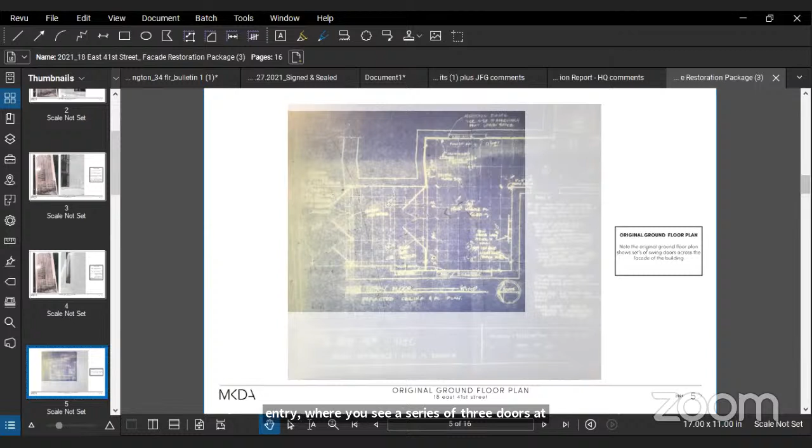Then in 1990 there was a restoration, or reconfiguration if you will, of the entry. This is as it exists today. The entry was pulled back into the building, away from the facade. There's a pair of swing doors, outswinging, and a revolving door. You can see the columns were beefed up at this time.

In plan view, the upper plan is the existing condition, and what we're showing dashed is what would be required in terms of removal to facilitate the changes presented in this application. The lower plan shows what the new configuration wants to be.

We want to introduce, in series, 2 pairs of outswinging doors, 3 foot wide by the full height, and we'll get into a section in a moment. This is for the tenant entry. The space to the left is the retail space, which in plan would remain unchanged.

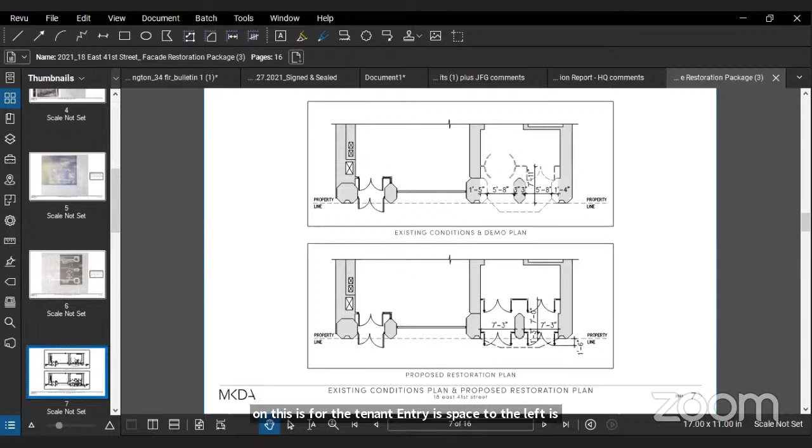Here's a photograph of the existing condition, where we have the retail space to the left, Tommy's, and then the tenant entry to the right with the black awning and wall sconces. If I had a comment on the 1990 design, it's a cavernous entry into the building, and we have this dark second story facade. So this is how it exists today.

Here is a rendering of the proposed solution. Most notably, we wanted to bring 2 pairs of doors forward at the tenant entry and widen them so you get 2 pairs of 3 foot each leaf doors with some minor side lights.

We would brighten the finish of the second story to this brass or bronze flavor. We would have the new storefront in that finish, and we would refinish the existing storefront into the retail space in the same fashion. You can see, though it might be hard to see here and we'll get into further studies, how we had to narrow down these columns in order to afford the width we needed for these full height doors.

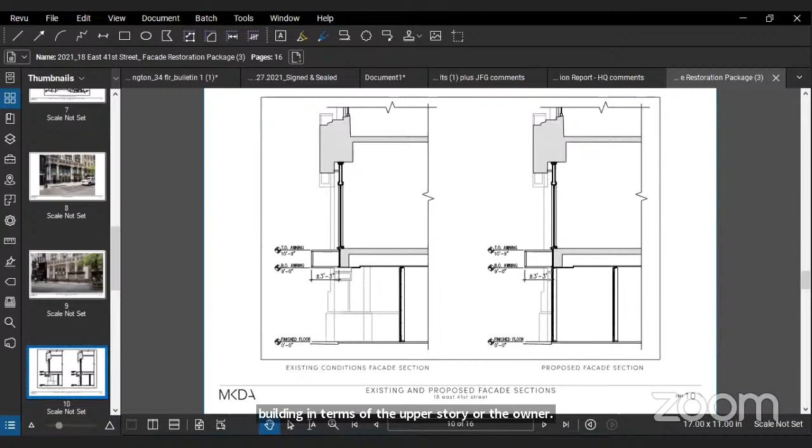If I go back for a moment to the plan, you see how the existing doors, although they're 3 foot leaves, there's not enough room between the existing columns to facilitate that. In section view, we wanted to point out we're not proposing any changes to the profile of the building in terms of the upper story or the awning. The awning would just be made wider to pick up the new width of the door opening.

Here is just a closer look at the existing tenant entry. Starting from the ground level, we have a stainless steel base, a reddish granite wainscot, and then stuccoed faux columns going upward, with the storefront recessed - the entry actually recessed into the building.

What we're showing as proposed is to bring those doors forward. We would wish to make the entire facade, the metal parts, all the same brass bronze finish, including the stainless base at the bottom. We would replace the red granite with a more brown or bronzy stone. Again, this offers protection, and at 18 East 41st this is the freight entrance as well as the tenant entrance.

We want to propose making the awning wider so we can pick up the width of the new doors, maintaining its height and its fit and finish in terms of what it's made - a stretched canvas with printed nomenclature for the address. We were hoping to replace the old large wall sconces with these slimmer bronze LED fixtures.

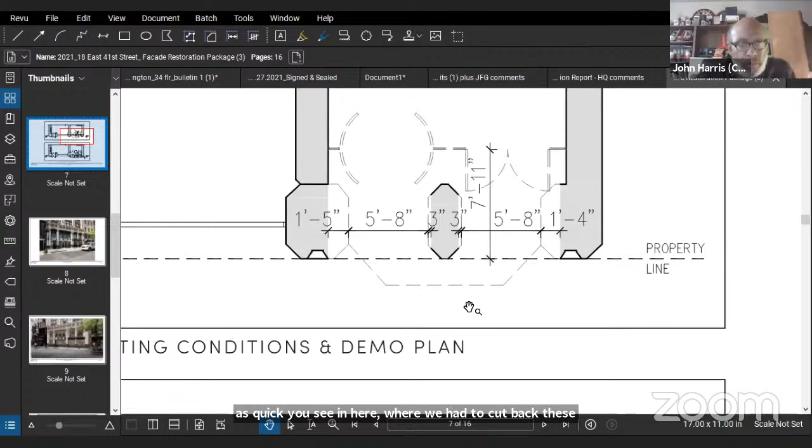Okay, so do I understand correctly that you're proposing to shave off a third of those? That's correct. You see here where we had to cut back these columns in order to get the width we need for those doors. Okay, so I did understand that correctly.

Moving on to Richard. Richard, go ahead. I lost a little bit of track, you used the word restoration, so I'm wondering, but what we saw was existing in terms of changes existing to new, and it wasn't clear to me to what extent you are actually doing certain things that will restore it closer to the original building. Could you talk about that?

Certainly. Here's a tax photo, I'm not sure of the date, but you can see where the storefront... well this happens to be the east side. If I go to the west side, where the doors were forward. So we were trying to restore the original architect's intent of having the doors at the facade and not recessed the way it is today.

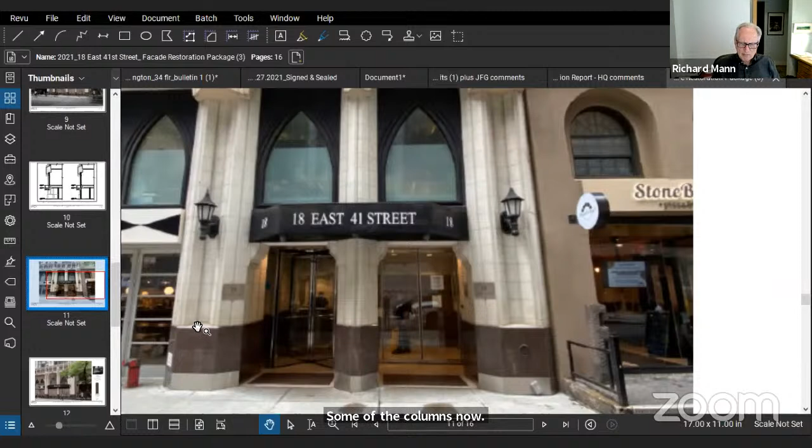Okay, and then I know you're shaving or narrowing some of the columns now. I think you said initially that the columns in the original photo were significantly narrower than they are today, is that right? That's correct. You can see in this photo how they don't align with the upper columns. Yes, I see. Same on the west side as well, you can see how narrow this is versus how wide the top one is.

And in fact, if we look at this drawing, the center column that we see here didn't even exist originally. They had a clear span of these three doors.

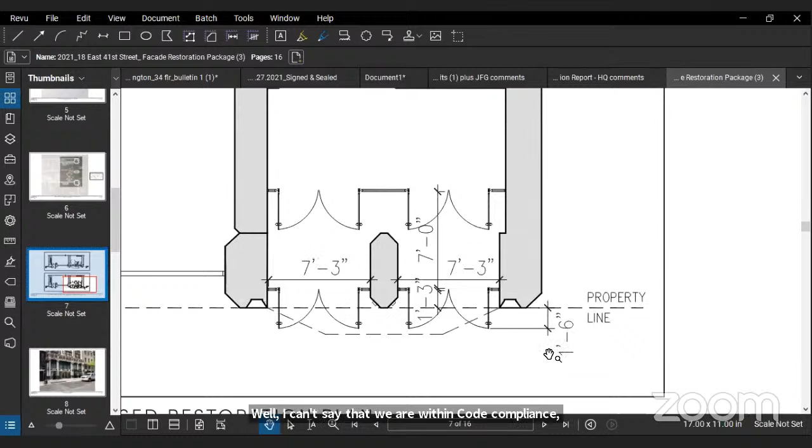Thank you, I have one other unrelated question. I see that the doors you want to put in swing out and extend beyond the property line. I'm not familiar with whether that's considered acceptable in general, because I'm envisioning someone walking into them when they're open. I don't know if that's a question for you or for the other folks on the committee to talk about. Well, I can say that we are within code compliance, not extending greater than 1 foot 6 inches beyond the property line. Got it, thank you. You're welcome.

Actually, can you put up the historic photograph, the one that LPC provided to you that has the entire facade? This one? Yeah, okay, thank you.

If we can stay on this one, I'm going to take the next question, which is from Barbara. You still have your hand up. Yeah, it's sort of a follow-up, which is, you're lopping off the sides of these columns, which you said are just stucco and were enlarged at some point. Was there any thought about carrying that up further so it doesn't look so truncated at that point, so it looks a little like an amputee, so it doesn't look so amputated?

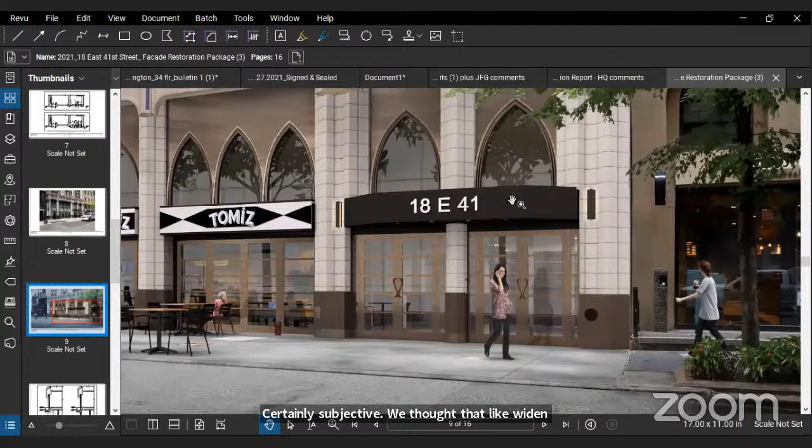Thanks, Layla. I noticed when reviewing this earlier today, the historic photo - has the applicant given any thought at all to a complete restoration of the retail and the second floor? Looking at the historical photo, it was very different. This neo-Gothic look on the second floor windows - all these changes are so extraordinarily different from the original design. I see you're trying to bring back some elements. Has there been any thought to restoring the entire two floors?

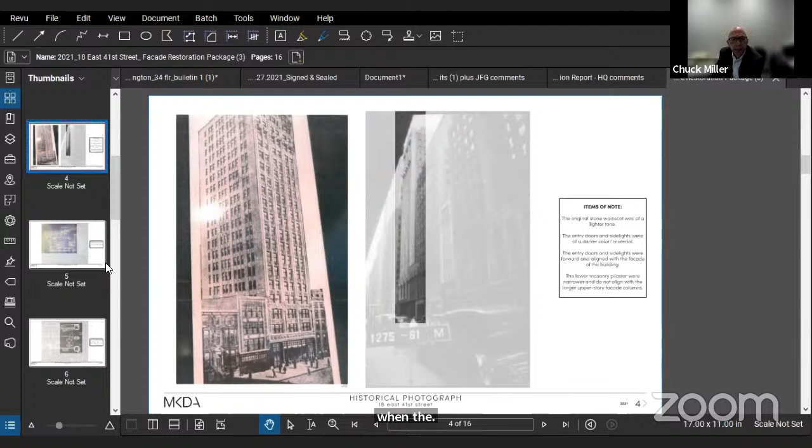All right, thank you. Chuck, you have your hand up. Go ahead. Thank you, Layla. If this was provided earlier, I apologize - do we know when the stucco columns were added to the storefront? Restoration was from 1990. And when was the building designated? November 2016. Okay, thank you.

Thank you. Any further questions, members of the committee?

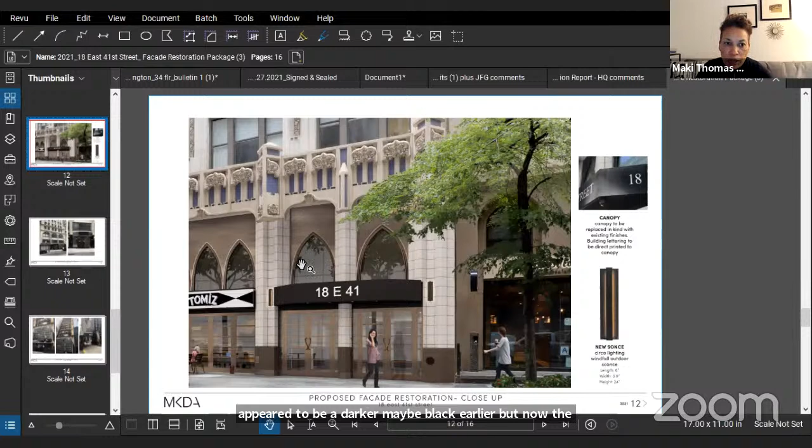Maki, go ahead. Just a brief question on the coloration of the windows above the awnings, please. I was curious because it appeared to be a darker, maybe black, earlier, but now the facade for that side as well as the adjacent side look more like an oiled bronze color. That is correct - that's part of the proposal, to refinish that second story so it all becomes a homogeneous appearance.

And John, just as a reminder, that was also in some of the comments from the staff, right? So they were also encouraging that. Okay, thank you. Any more questions, members of the committee?

Okay, seeing none, I am going to open up the floor to members of the public. Do we have any questions or comments? Charles Person, you are permitted to speak, and you can unmute yourself and go ahead with your comment or question.

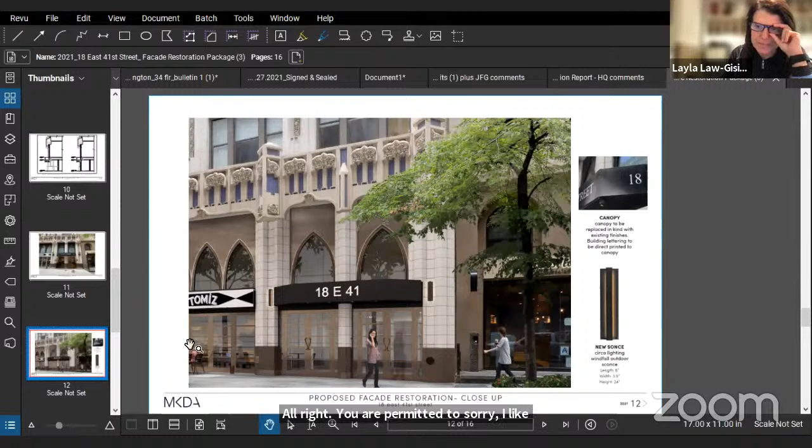Charles, we're ready for your question or comment. All right, you are permitted to speak. Sorry, hello. Yes, go ahead. I apologize, I used a talking computer, I had a little issue there.

I apologize. So I had a question about the removal of the red granite. I think, do forgive me if I got it wrong, but I think there was no mention of replacing any red granite at all - I think it's removing and replacing it with some other material. Is red granite a historical material that some buildings have in New York City? Is it rarely used, has it got any historical significance? And why is it being removed in the first place? How much of the red granite is being removed - is it all of it, or will there be some left over?

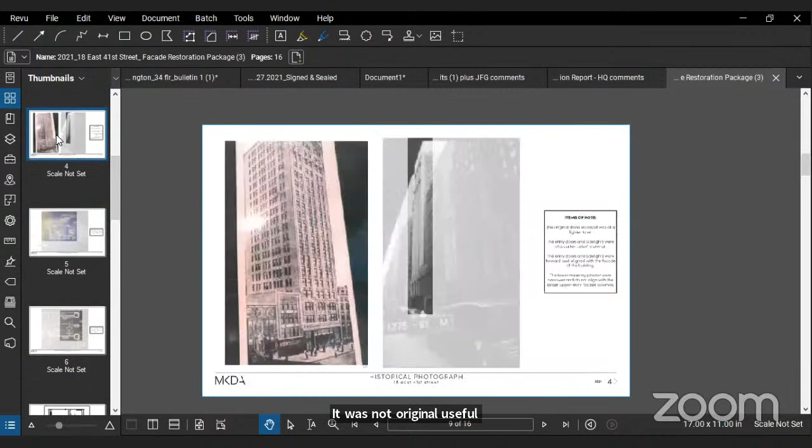The idea is to remove all of it because we have to modify it for this new entry, and we're not going to be able to match it. It was not original - the historic photos show something of a much lighter color at the base. You can see it's much lighter, but we want to maintain the color palette of what we're doing with the storefronts. So we thought something not as red, maybe more brown, but not as bright as it used to be.

Okay, so it has no historical significance then. Not at 18 East 41st, no. Okay, thank you. Any other questions from members of the public?

Okay, seeing none, we will move to business session. During business session, only members of the committee are allowed to discuss the matter. Are there any comments from members of the committee on this application? We need comments, members of the committee. Barbara, go ahead.

I'm troubled by the tenant entrance. I sort of slipped and made the comment before that we're sort of these piers that are coming down are being kind of amputated, and then the canopy, the signage, is somehow going to ameliorate that. I just feel it's somewhat, it feels awkward to me, and certainly not historic.